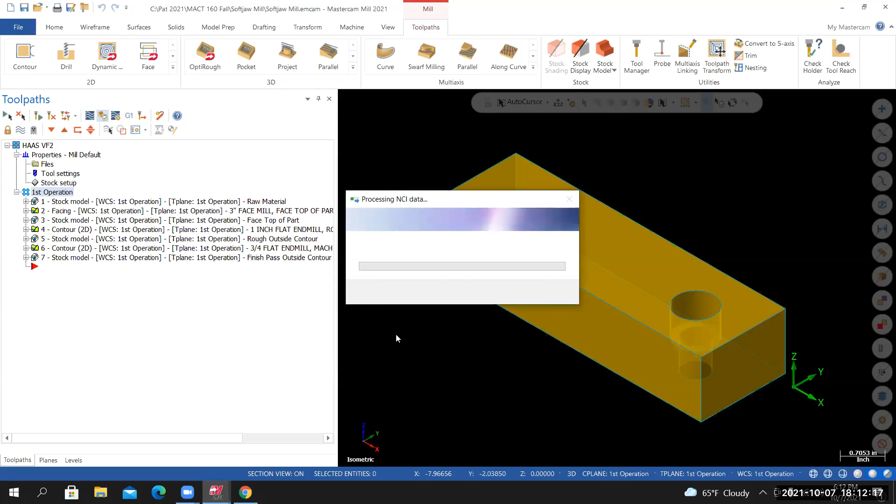Takes a moment for Verify to open up. Once it's opened up, make sure the stop condition collision is activated. I got a check next to it. And then run it. So what we've done so far is we faced 20 thousandths of material off the top of the part. We machined the outside profile with a dedicated roughing tool, and then we came in and we finished the outside profile to the finished dimensions with a dedicated finishing tool.

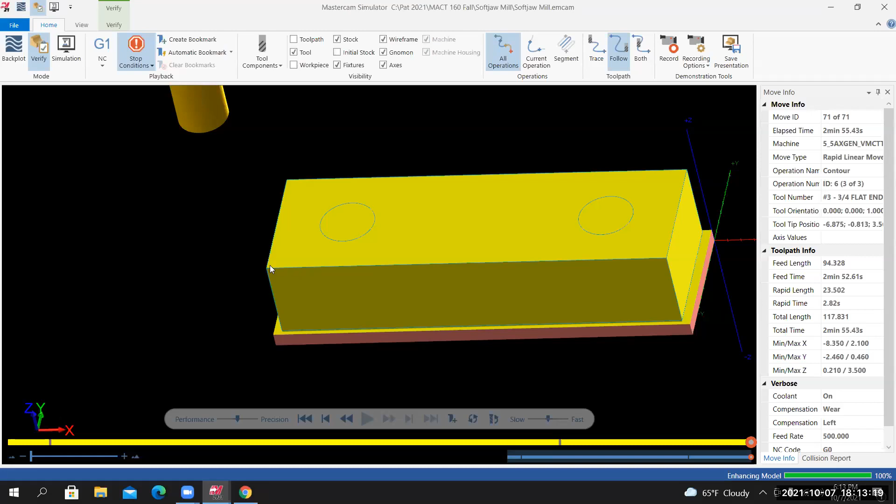What we'll need to do now is we'll need to spot drill, create pilot holes for the drill that's going to go all the way through the part. We'll need to drill through with a 17/32 diameter drill, or the drill that's specified on the drawing. We'll need to machine the counter bores. We'll use a chamfer mill to break any sharp edges that we might have created. And we're also going to engrave our initials on this top face right here.

So from here, I've got a good idea where we need to go. I'm going to exit out of Verify. Looking at it from an isometric view, we'll go back to the project page and we'll follow the instructions given there. So we've completed step 5. We're moving on to step 6. Use the drill toolpath to create the 0.25 pilot holes in the part.

So I'm going to scroll all the way down to the tool list. We've used tool 1, the face mill. We've used tool 2, the dedicated roughing tool, and tool 3, the dedicated finishing tool. Now on tool 4, this is our 1/2-inch diameter spot drill, 90-degree DPA. We're being instructed to use a C4 C3-0032 tool holder, and the tool projection, or the tool stick out, is 1.5 inches. So I have enough information to work with.

I'll go back into Mastercam. Make sure the insertion arrow is at the very end of the toolpath group. Go to toolpaths. In the 2D section, select drill. Brings up the toolpath hole definition dialog box. I'm going to select the large circle that represents the counter bore on this top face here. Now be careful, don't lock on to the quadrant. If you position your cursor on the outer edge of the circle, you'll see the center point icon pop up next to your cursor. That's what you want.

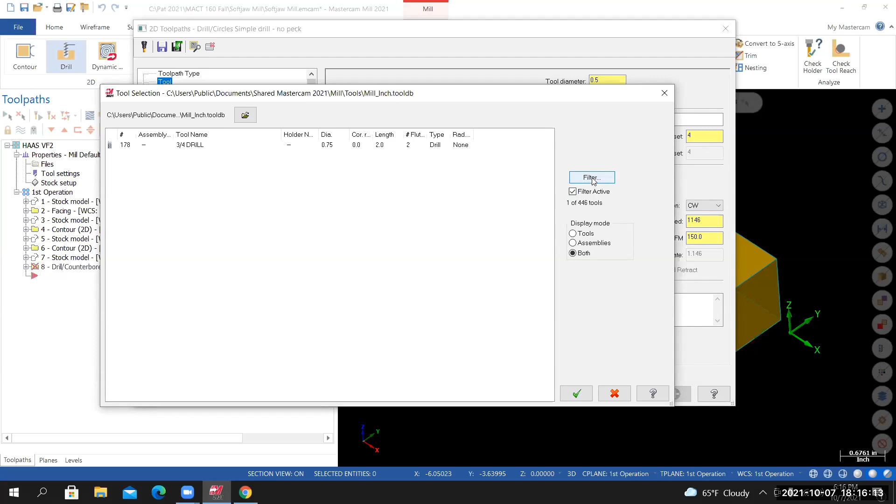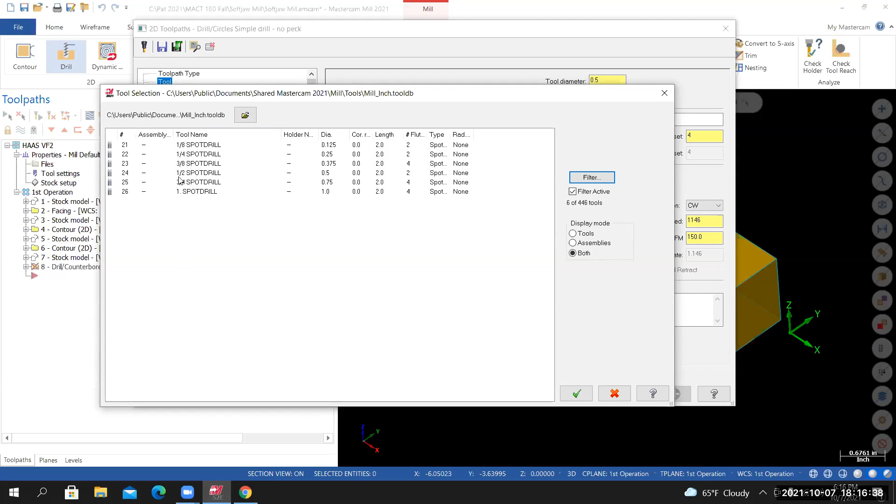I'll deselect drill. I'll select spot drill. And to see all of the spot drills coming out of the library, I'll set the tool diameter to ignore. From here, I'll select OK. Out of this library, we have 6 spot drills to choose from. The 1/2-inch diameter spot drill is the one I'm interested in, so I'll double click on it. And it's added to my tool list as tool number 4. I'll need to make some changes to the default settings of this tool. To do that, I'll right click on the tool. And from the flyout menu, select Edit Tool.

Things that I'll change on this page. It's showing the cutting length to be 2 inches in length. On a spot drill, usually the cutting edge doesn't go beyond where the full diameter begins. And it doesn't have the ability to remove or evacuate chips beyond this edge in most cases. So to create a more realistic representation of the tool, I'm going to set the cutting length to the drill tip length. So 0.5 times 0.5.

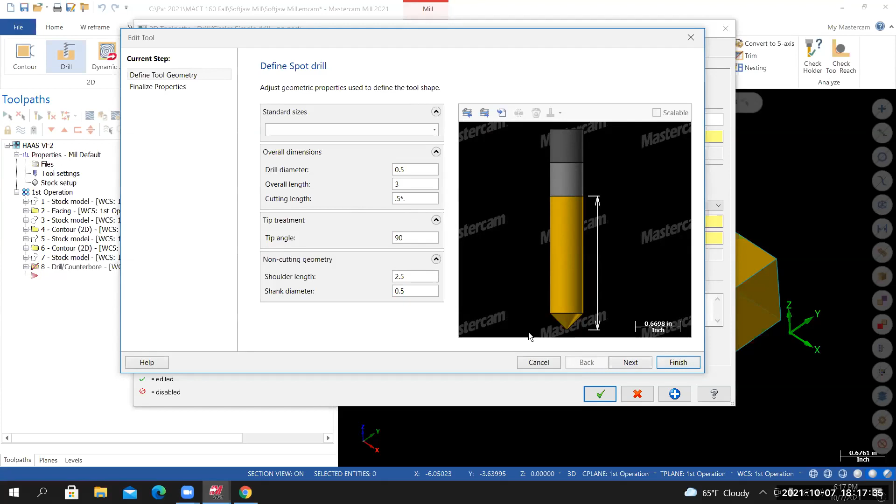The cutting length is 0.25 inches long. And then for the shoulder length, I'll just set this to 1. Mastercam will only let us hold on to the dark gray area of the tool. So if this value is too great, it'll only let us have a tool projection or a stick out length of 2.5 or greater. So I'm setting this shoulder length to 1, and that way we can set our tool projection to 1.5.

From here, I'll select finish. I should not have selected finish, my bad. So we're gonna have to go back into that tool. So right click, edit tool. This page is complete. I still need to go to the next page, so I'll select next.

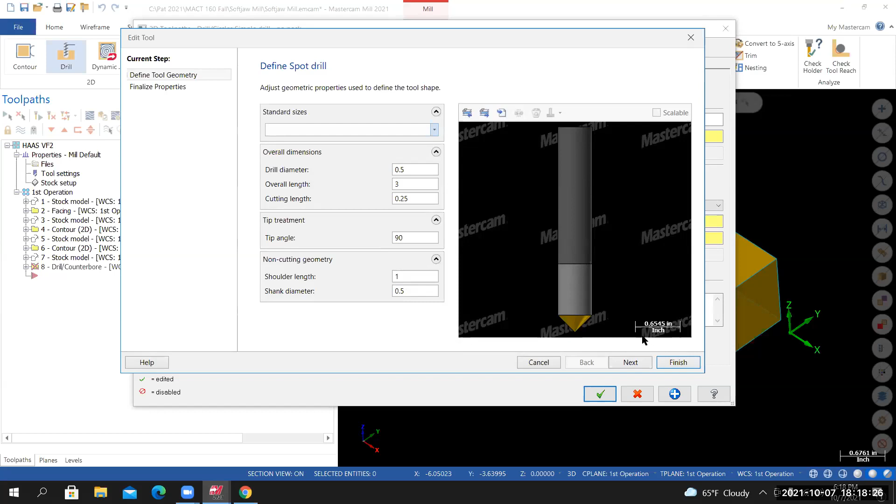To get Mastercam to calculate the feed rates correctly, set the number of flutes to 1. To calculate the RPM, I'll select the calculator. And then to turn the coolant on, I'll select show more options. I'll select coolant, and then under flood, turn it to on. From here, I'll select OK. And that'll be all the changes that I need to make to this tool.

So just to recap what we did: number of flutes 1, calculated the RPM, and then I turned the flood coolant to on. From here, I'll select finish. Back to this page, we've already calculated our RPM. We'll need to update our feed rate.

Now with drills, think of the FPT as feed per revolution, FPR. To calculate our FPR, the FPR will be equal to 2% of the tool diameter. So we have the decimal equivalent of the tool right here. I'll type in 0.5, multiply by 0.02. That's 2%, hit enter. Mastercam is calculating the feed rate for this drill at 11.46 inches per minute.

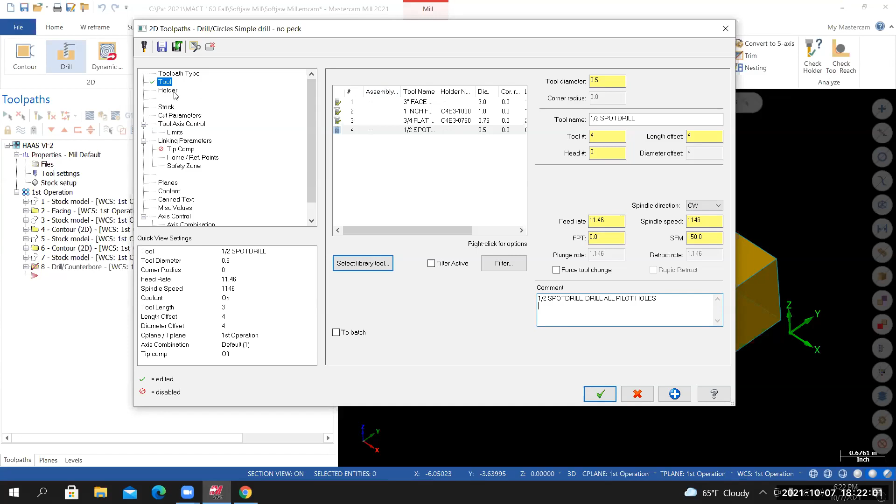So from here, I've completed this page. Once again, make sure that these comments are all caps. From here, we're going to go to the tool holder. We're going to use the tool holder that's been identified on the project page. So go down to the tool list. We're using a C4C3-0032. Tool projection is 1.5 inches. Now that's a Cat 40 inch tool holder.

Instead of looking through this long list of tool holders, I'll go to Open Library. CT40-IN, Cat 40 inch, open it up. And it's a shorter list. These are all Cat 40 tool holders. I'm looking for the C4C3-0032. This is an ER32 type tool holder. It's a collet tool holder. Set the tool projection to 1.5 inches. And that'll complete all of the changes that we need to make on this page.

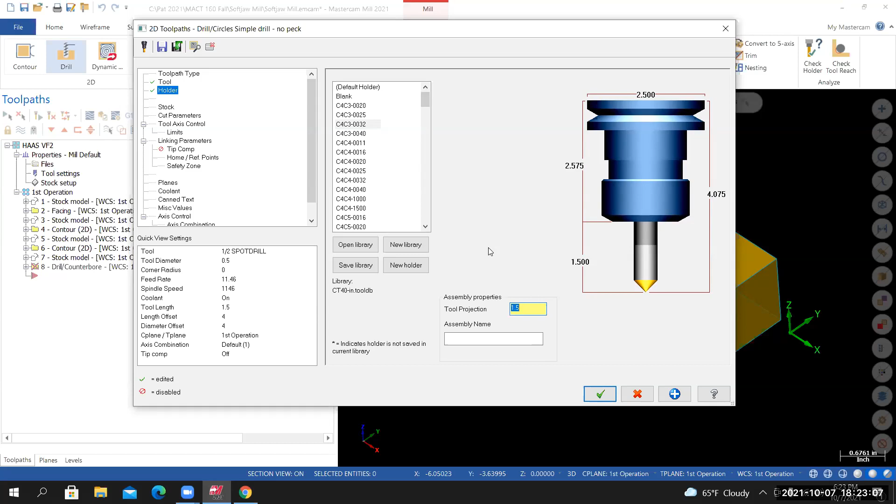From here, go to cut parameters. The cycle should be drill/counterbore. And if we have the dwell value set to 0, it's going to create a G81 drilling cycle inside of our NC file, and that's what I want. We're creating a pilot. There's no need for a dwell, so set this to 0.

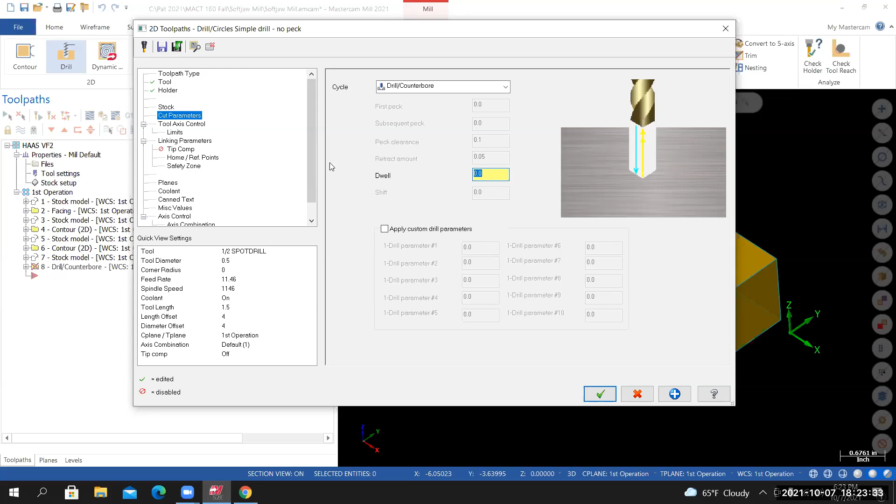From here, jump down to linking parameters. We're going to use the same clearance that we used for the previous toolpath. So activate clearance, set it to absolute. We're using a clearance plane of 3.5 inches. That'll place the tool at least 2 inches above the top of the part when it's rapiding from one location to the other.

I'll check use clearance only at the start and the end of the operation. For the retract, I have it set to incremental. I'll set the retract value to 0.1. For the top of the stock, I'll set it to absolute. Remember our origin is at the bottom of the material, so this top of stock is going to be greater than the part thickness. So I'll select the top of stock icon. I'll let my cursor lock on to the top of the part.

1.48, absolute. And for the depth, I'll set it to absolute. I'm creating a pilot or a countersink, and we can control the diameter of the countersink by using the calculator that's provided. So in this case, I'll select the calculator. From the depth calculator dialog box, I'll select overwrite depth. And for the finish diameter, we're instructed to create a pilot 0.25 in diameter. So set the finish diameter value to 0.25 and hit enter. From here, select OK. And you can now see the value here, the top of stock is 1.48.

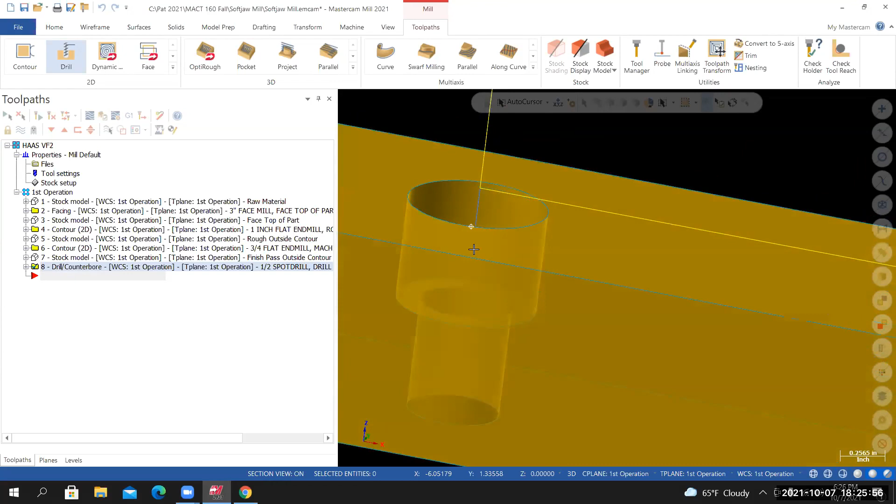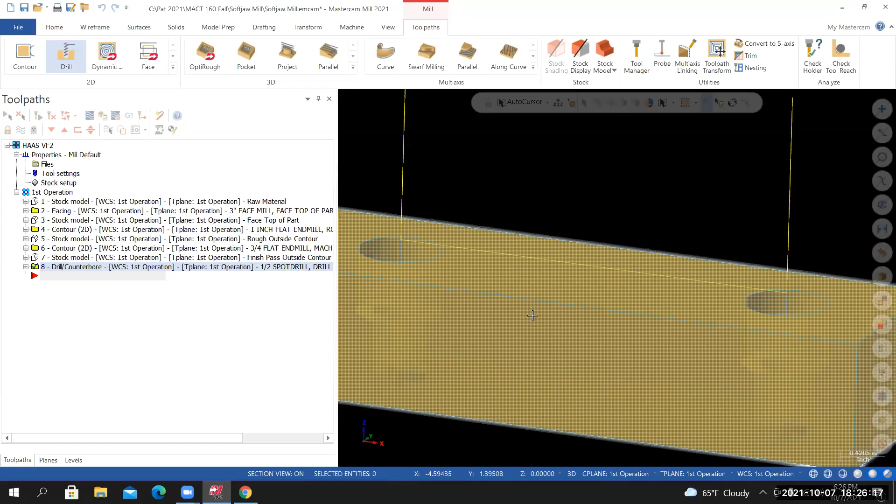I can see the tool path. The yellow lines represent rapid moves. And if I zoom in, you can see the blue lines. Those are feed moves. So the blue line represents the drill moving through the material at 11.46 inches per minute. I don't see any issues with the tool path. If this yellow line was moving through the material, I could then see that I would have a problem. So I don't see any issues with the tool path yet.

We'll run it in backplot. And to do that, I'll select the tool path. I got a green check next to just that tool path. I'll select the backplot icon and slow it down a little bit. With just 2 holes, I want to go kind of quick. So slow it down, select play. A little too slow, so I'll speed it up. Not seeing any issues with backplot. So from here, I'll exit out of backplot.

I'll toggle off the display of that drilling operation. So toggle display. I'll look at it from an isometric view. I'll fit my screen and I'll unzoom 80%. And before I go to verify, I like to save my work. So file save. To run the entire toolpath group inside of verify, I'll select the first operation toolpath group. You see green checks appear next to everything. And then I'll select verify. Double check, make sure stop condition collision is turned on, and then run verify.

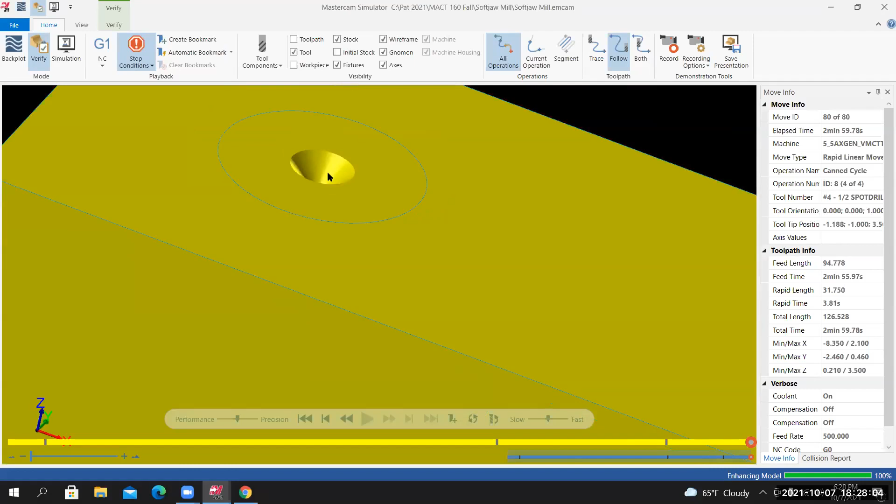I'm inspecting the machined model and you can see the 1/4 inch pilot holes drilled on the top surface of the part. Their intention is to guide the drill that's going to go all the way through the part. So everything looks good here. From here, I'll exit out of verify.

I need to create a stock model that reflects all of the tool paths that we've created up to this point. Make sure that the insertion arrow is at the very end of your toolpath group. Go to the toolpath tab. In the stock section, select stock model. In the name field, let's call this drill pilot holes. Stock plane, I have it unchecked. It's at the top. Initial stock shape. Let's use the stock model from the previous operation.

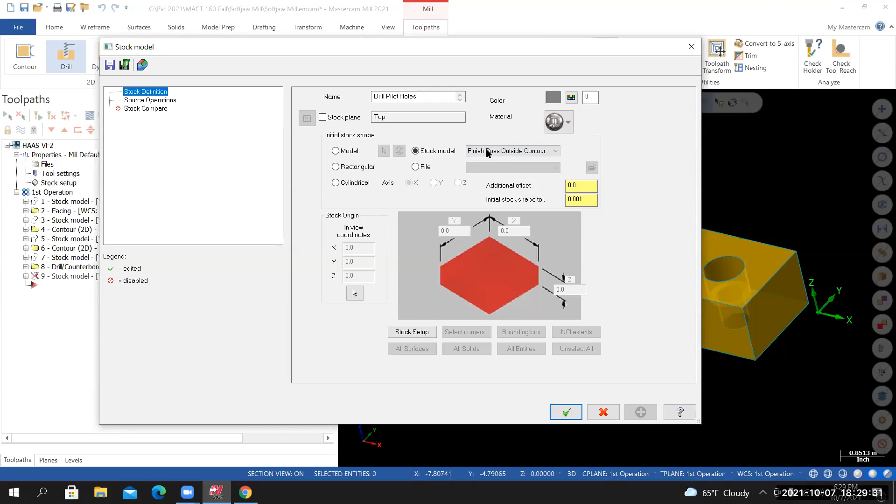So select stock model, expand the stock model menu, and I'm going to use the finish pass outside contour. Now yours might be named slightly different. This is a stock model that I created from the previous toolpath that we created. So I'll select that stock model, and then I'll go to source operations. And for the source operation, let's select the drilling operation that we just created. I'll select OK.

You'll see the stock model appear. And I like to inspect it and make sure that it's correct. So you can see that the majority of the material is still inside of the holes, but you can also see the pilot at the top center of the hole. So that's what I wanted to see. Everything looks good. From here, I'll toggle off the visibility of the stock model. Once again, I'll look at it from an isometric view and I'll save my work.

So now that we've created the pilots for the drilling operation, I'll go back to the project page and move on to, let's see here. Oh, something's happening here. So creating, okay, got it. So we have moved on to step 7. We've created the pilot holes. We're now going to drill through.

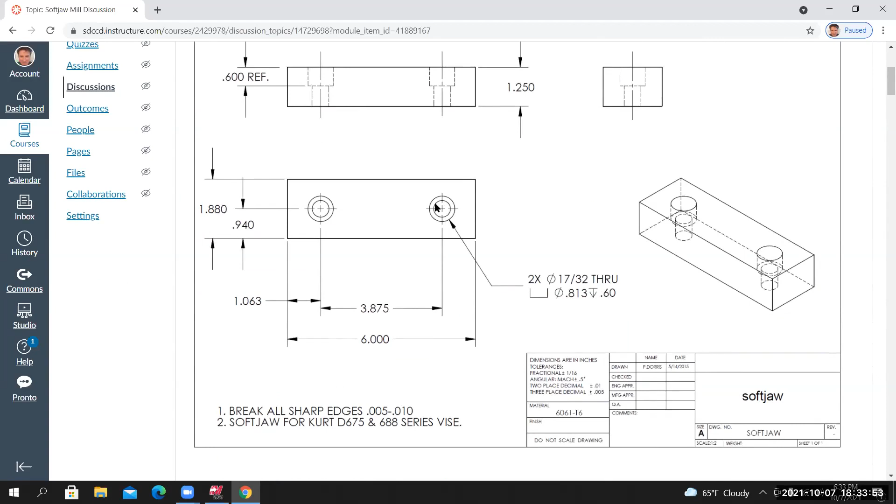So use the drill toolpath to create the 17/32 diameter holes in the part. And if I look at the blueprint, just to check, the 17/32 diameter hole goes all the way through. So we'll have to make sure that we do that inside of the program.

If I go down to the tool list, tool number 5, this will be our 17/32 diameter drill. It's got 118-degree drill point angle, DPA. And we're instructed to use a C4C3-0032 tool holder. Tool projection will be 2 inches. Okay, so let's go back into Mastercam.

Now, something that we can do, it might save us a little bit of time. It might cause more problems. We could actually copy this toolpath. I don't know if I've shown you guys how to do that yet, but if you've got drilling operations, sometimes there'll be a sequence of drilling operations. It could be a pilot, a drilled hole, a countersink, a tap. So there could be a series of drilling operations that are considered similar or like drilling operations.

And in situations like that, it'll save you a lot of time where you copy existing toolpaths, make a few changes to that copied toolpath, and it works for the next tool. So let's try doing that. We'll have to be very careful on how we go about doing it. First off, if you have everything selected, select just the item that you want to copy. So I'm going to copy the drilling operation that we just created. So in my case, it's operation 8. There's a green check next to just number 8, the drilling operation.

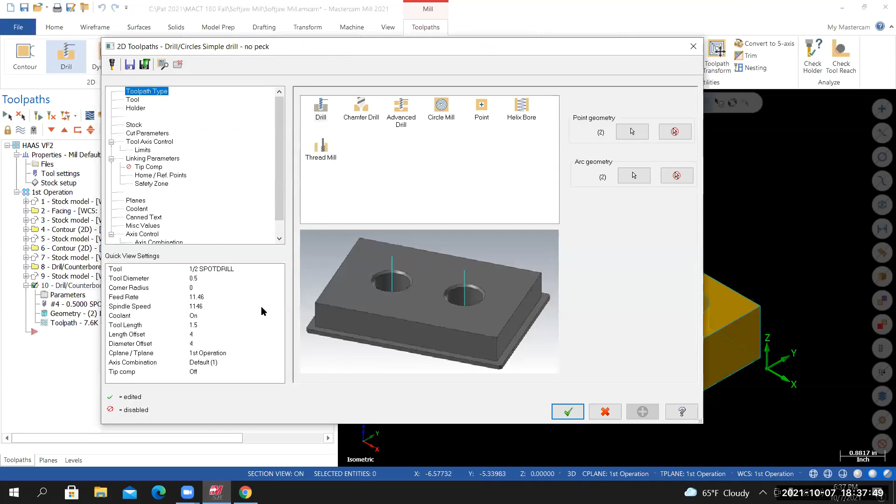So once you have that new toolpath pasted in your toolpath manager, expand it. And can you guys see my screen? Yeah. Okay, perfect. So once you have that toolpath pasted into your toolpath manager, select parameters and then go to tool. This particular toolpath is currently referencing the 1/2 inch diameter spot drill. We're going to add the 17/32 diameter drill to our tool list.

Select the select library tool. Now my filter is still active, so I'll go to filter. I'll deselect spot drills. I'll select the icon right above spot drills, drill. And for the tool diameter, it's currently set to ignore, set it to equal. And then in the value field, type in 17 divided by 32, or the decimal equivalent of 17/32. So 17 divided by 32, hit enter. 0.53125 is the decimal equivalent. I don't expect you to remember that.

So from here, I'll select OK. I've got one tool that fits that description. Double click on it. And it's added to my tool list as tool number 5. I'll need to edit the default settings for this tool. Right click on the tool, select edit tool.

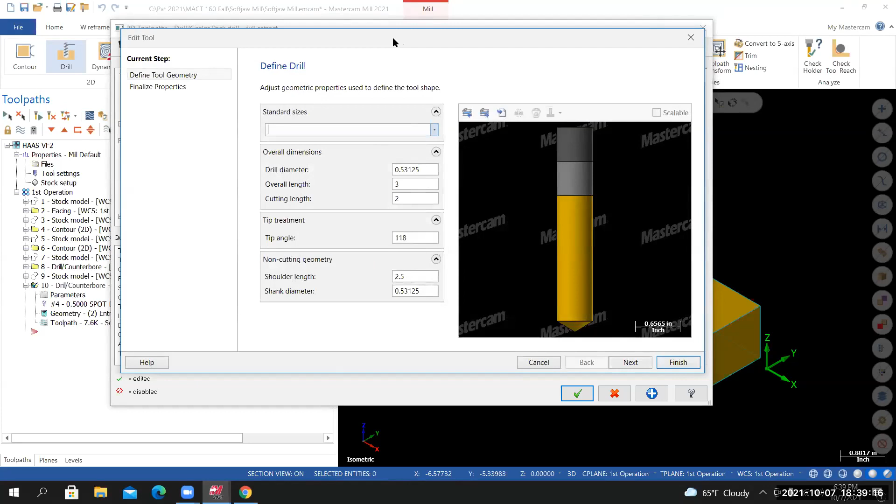Right away. If I remember correctly, we were told to use a tool projection of 2 inches. So I'll need to make some changes to the cut length and to the shoulder length. Go back to the project page, saying tool projection is 2 inches. To make that work, let's set the cutting length to 1.75 and then set the shoulder length to 2. And that'll allow us to set the tool projection to 2 inches.

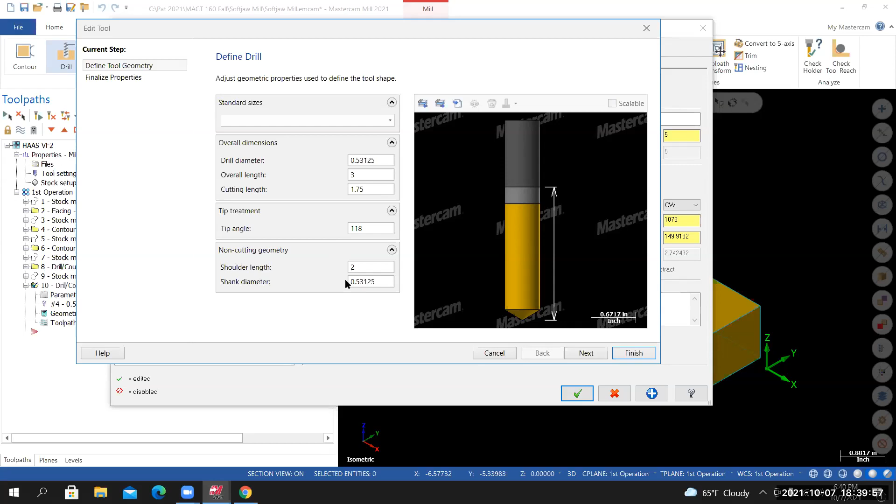Once you make those changes, select next. On this page, we'll start with changing the number of flutes. To get Mastercam to calculate the feed rates correctly, set the number of flutes to 1. And we do that for drills. To calculate the RPM, select the calculator. To turn on the coolant, select show more options, select coolant, and then set the flood coolant to on. From here, I'll select OK. And that should complete all of the changes that we need to make to this page.

Oh, Professor, can you go back to the tool edit again? Yeah, sure. Tool edit, back to the geometry page. Yeah, that one. No, this is good. I just wanted to. Yeah, so the cutting length 1.75, and then the shoulder length 2. Then you had 1 flute, right? Yeah, that's on the next page. Set the number of flutes to 1. Select the calculator and turn the flood coolant on. Cool. Thanks. All good? Yeah. Thanks. Hey, you're welcome.

So from here, let's select finish. And you can see the RPM has been calculated, and this is a rounding issue. So we use a 150, but what you're seeing here is a reduced value, because we want a whole number here. So that's what's actually being used. It's still 150. Just look at it that way. It's so close. We'll just call that 150.

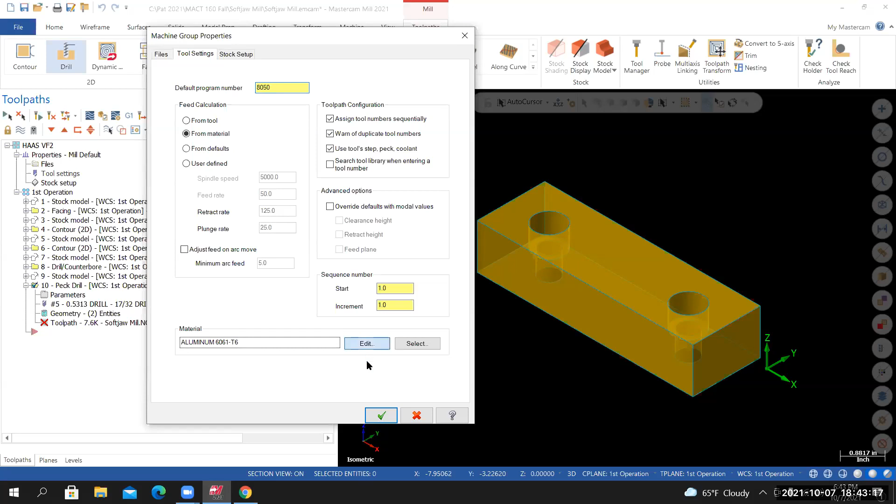Yeah, so I'm going to select OK. I'm going to have to do the same, select OK. Go to tool settings. So you exited the toolpath. Go to tool settings. Where it says material, go to edit. I believe yours is set to 60% right here. So percentage of base, what is yours saying right now? Mine's at 50. It's at 50? Yeah. Okay. And what was the other one at? Okay.

So now go back to the parameters. In this field, make sure you type in 0.53125 times 0.02. So 0.53125 times 0.02. And mine's at 11.46. Did that resolve the problem? It's calculating the feed rate as 12.17. What's your FPT? 0.0106. 0.0106. What's your spindle speed? That's set to 1146. 1146. And your SFM, what's your SFM? 159. 159. Okay, so this is what we're gonna do.

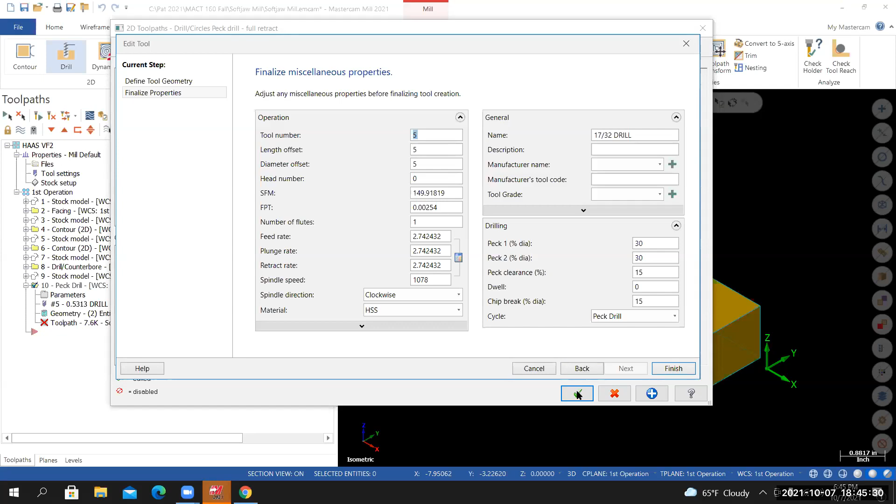Go back, right click on the tool, select edit tool. Go to the next page. Are you on the same page as me? Yes. Select the calculator. And what's your RPM now? What's that? SFM is 149. 0.91819. That's correct. And your spindle speed should be 1078. Is that what you're getting? Yes. Perfect. Okay, select OK. Oh, I'm sorry, select finish, my bad.

And now in these fields, you should see the updated SFM and the updated RPM or spindle speed. Now go over to the FPT. Now you'll notice when you go back in and edit the tool definition, it changes the feed rate back to whatever it was previously. So in the FPT field, take the tool diameter 0.53125 times 0.02, enter. And you should get 11.45 and some change for your new feed rate. Yeah, that fixed it. Perfect.

Cool. So from here, let's make sure we have a comment in the field. This comment is from the previous toolpath. Remember, we copied this toolpath, so clear that out. I'm going to borrow the tool name. I'll paste it down in the comment field. And let's do this. Say drill all holes through.

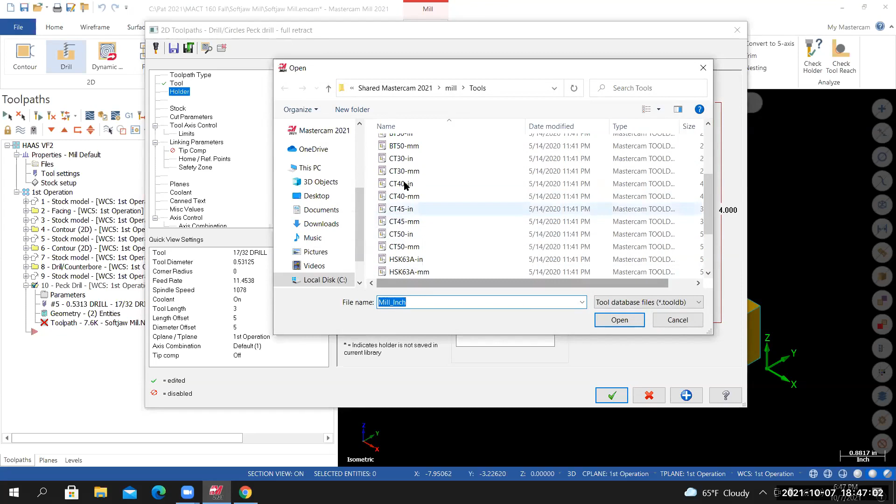And that'll complete all the changes that we need to make to this page. We're going to use the same tool holder that we used for the previous tool. So go to holder. We're going to look in the Cat 40-inch tool holder library. So go to open library. CT40-IN. Open that up.

And we're going to use a C4C3-0032. Select it and set the tool projection to 2 inches. And that's what we're instructed to do on the project page. So the tool projection, you need to be aware of what your tool is, what you need the tool to do. So if I was drilling a hole that's 3 inches deep, would this situation or would this setup work for me?

No. No, it would work until we got to about 1.999 inches into the part. Does that make sense? And then that next peck would be pretty bad. So you want to make sure that the tool projection is greater than the depth that you're drilling to. So just something to be aware of.

And the tool projection will also be, with other tools, it just needs to be long enough so that when you're cutting the part, the collet nut or the tool holder doesn't run into the material. So that's what we're controlling here. So when we set these values, they will turn up later in the setup sheet. And that's how far the setup guy knows to extend the tools from the tool holder. That make sense?

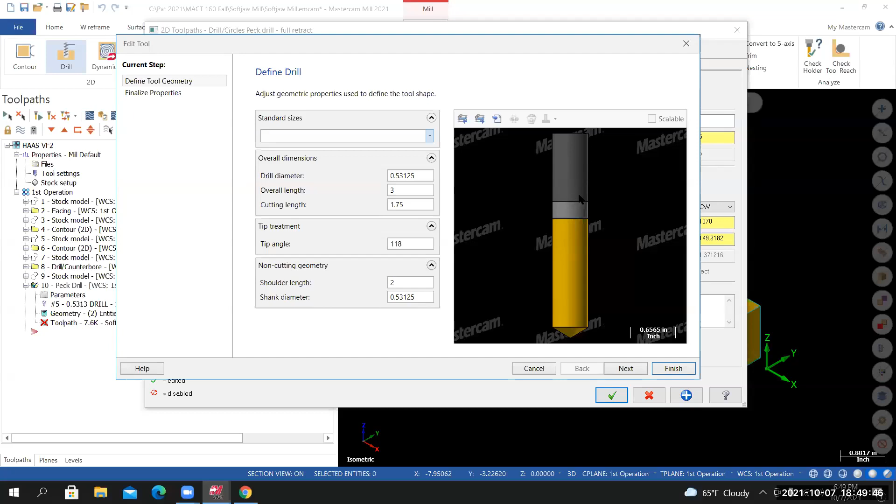Now, this isn't a very realistic scenario. With drills, you could probably choke up on them even onto the cutting flute, which I don't recommend, but it's possible. So Mastercam only lets us hold on to the dark gray area of the tool. So that's why we have to change the cutting length and the shoulder length. So cutting length, I had to shorten it, the shoulder length, I had to shorten it. And in this case, the shoulder length is becoming our tool projection. So from here, I'll select finish.

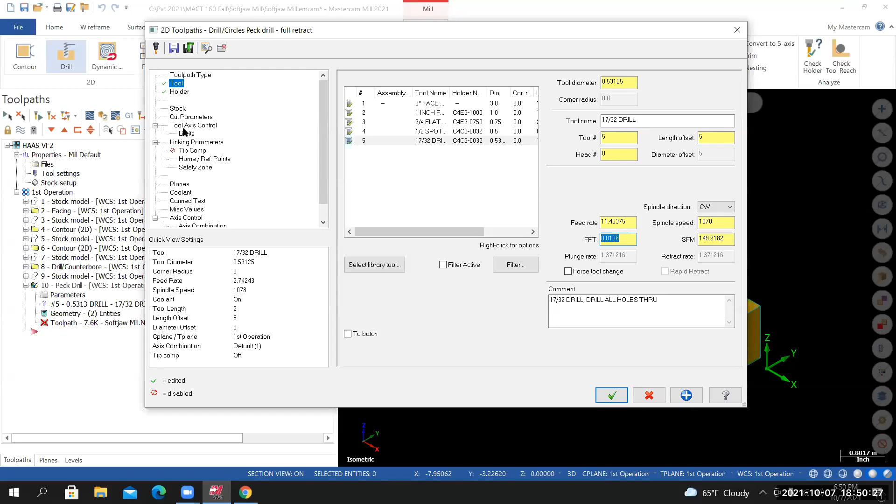Now, the drawback of editing the tool is it changes my feed rate back to whatever the first value was. So I have to go to FPT, 0.53125 times 0.02. I have to recalculate my feed rate. I'll jump down to cut parameters. Now, when we changed over to a regular style drill, not a spot drill, Mastercam changed over to a peck drill cycle. And then the peck increment is equal to the drill tip length.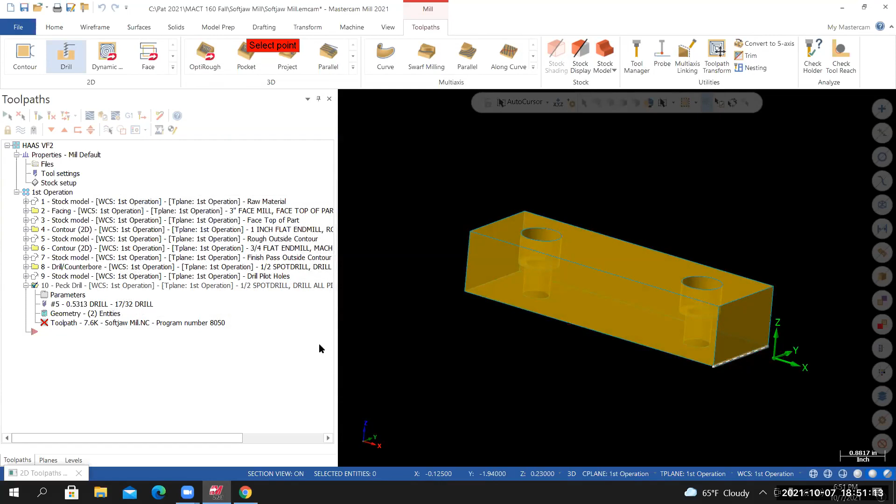From here, go to linking parameters. Remember, this is a copied toolpath, so most of this information is already filled out. Everything will work except the depth. The depth was calculated by Mastercam to create that pilot. I need this hole to go all the way through the part. So I'll select the depth icon. I'll select the bottom of the part. And you can see that it's now drilling to 0.23 relative to the origin.

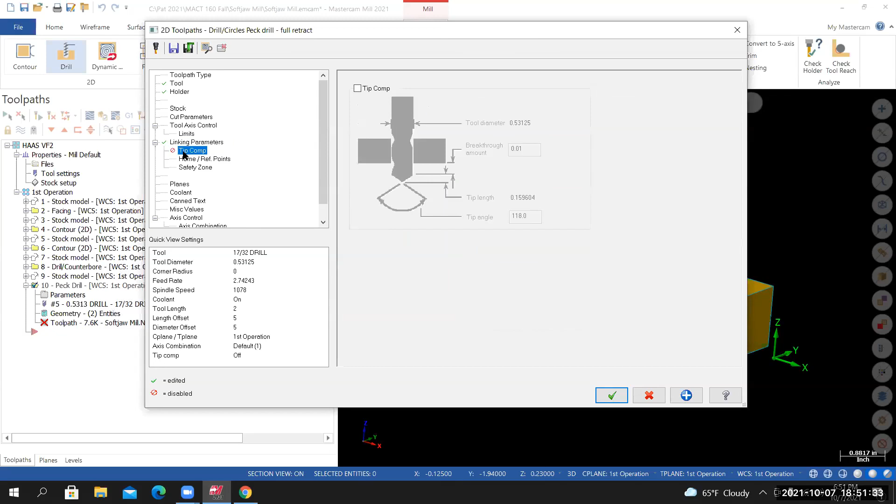Now, this value is telling it how far to send the tip of the tool into the part. I need a full diameter going all the way through the part. So I'm going to activate tip comp. So select tip comp, select the checkbox, set the breakthrough amount to 0.025. And you can see, this graphic here explains what's going on.

This is the bottom of our part, and you can see it's going to go an additional amount based off of this breakthrough amount. And then the tip length that Mastercam is calculating. This tip length is based off of the 118-degree DPA, and that matches our tool. So from here, I'll select OK. Now, because it's a copied toolpath, we'll need to regenerate it. So I'll select regenerate dirty operations. And now with just that new toolpath selected, I'll run it in backplot.

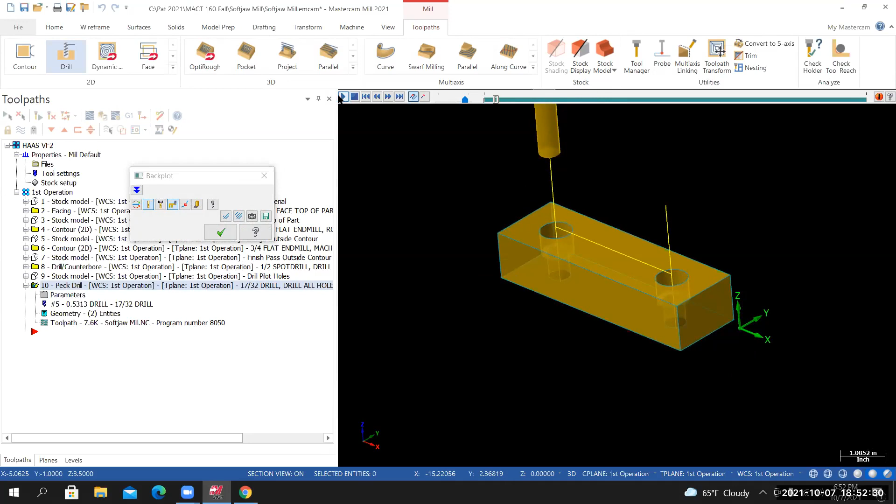I can see that the tool is going all the way through the part, and to double check that, if I look at it from a front view, I'm hitting the S key to single step through. Now, here's our final depth that we're drilling to. And I can see the full diameter is going all the way through the part, and that's what I want to see. So that looks good.

From here, I'll exit backplot. I'll look at it from an isometric view. I'll save my work. And we're going to run the entire toolpath group inside of Verify. So I'll select the first operation toolpath group. I get green checks next to everything. I'll select Verify. Make sure stop condition collision is turned on. And run Verify.

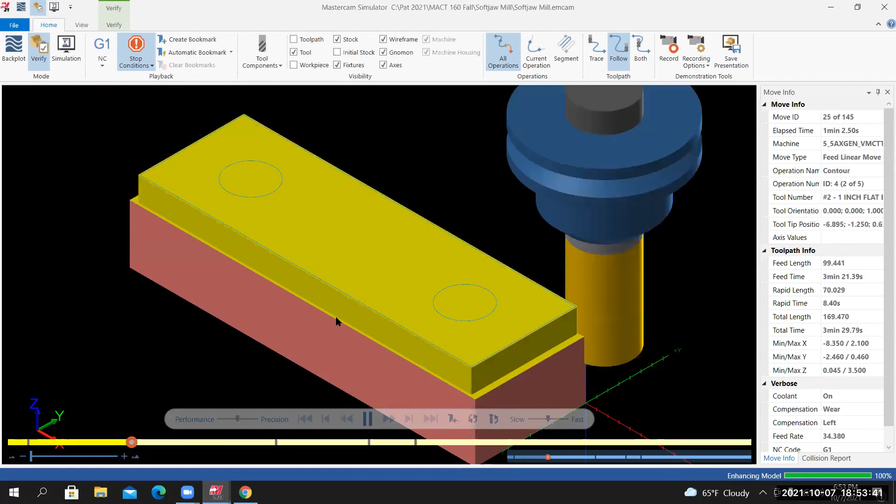Now to inspect the machined model or machined part, I want to see how deep the drill has gone into the part. And I want to change over to a translucent stock. And you can do that inside of Verify. So Home tab, in the visibility section, you'll see a check next to stock. If you left click on it once, it changes over to a square inside of that box. And our machined model is now transparent.

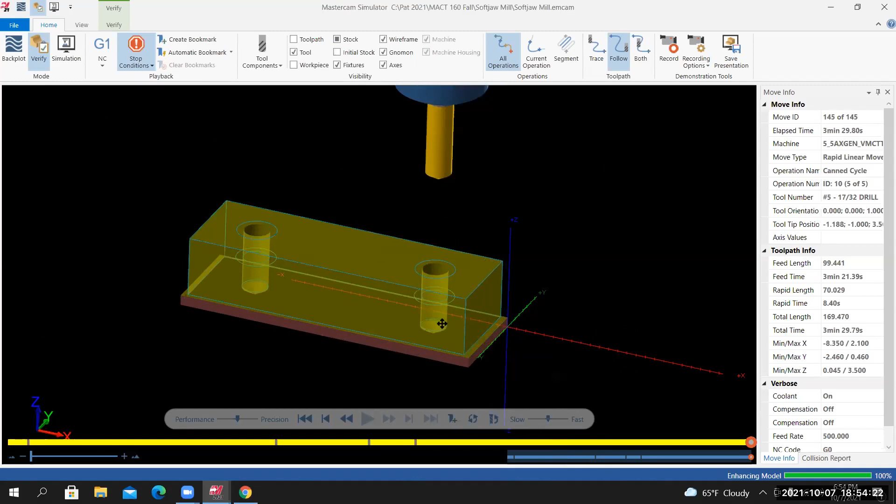And I'm zooming in, and you can see this circle here, this bottom edge of the hole. You can see the full diameter of the drill goes all the way through. And that's what I wanted to check for. So once you verify that the machined model is correct, if I select stock again, it changes over to a wireframe view. The box is empty. If I select it again, the check reappears and we are now looking at a shaded view.

So everything looks good. From here, I'll close out Verify. I'm looking at it from an isometric view. And the next thing I'll do is I'll create the stock model that reflects everything that we've done up to this point. The insertion arrow is at the very end of the toolpath group. From the toolpaths tab, in the stock section, I'll select stock model. For the name, let's call it drilled holes.

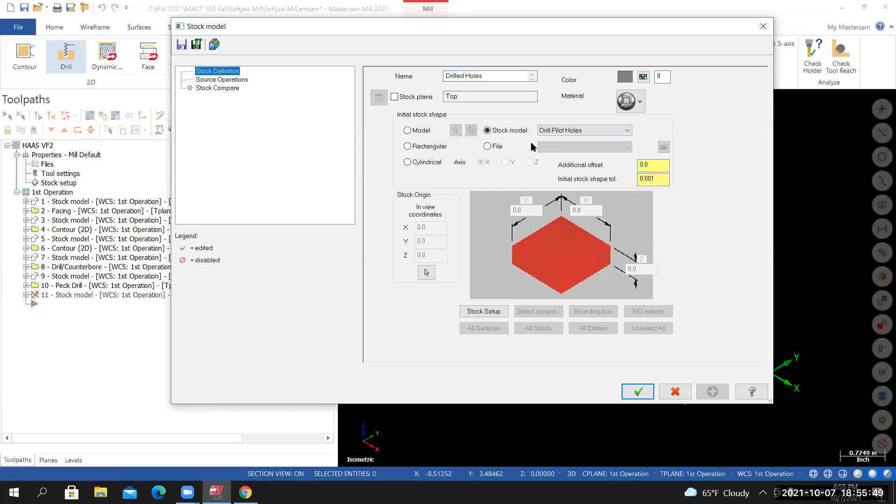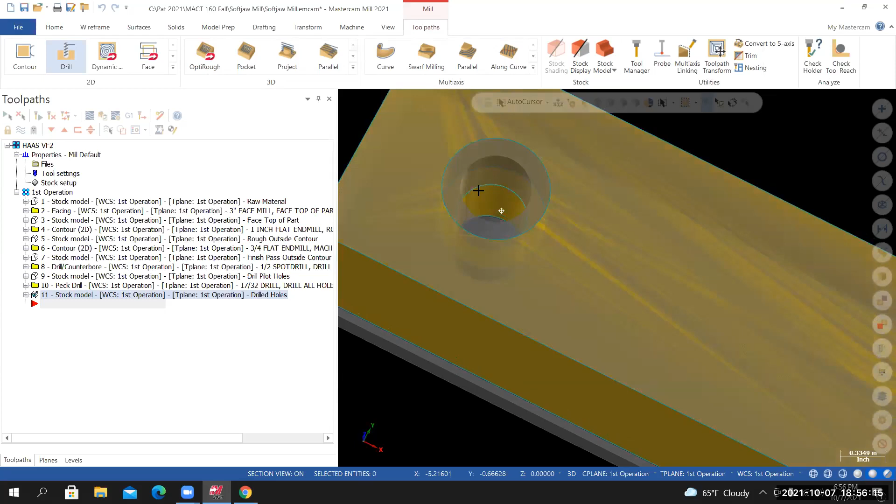For the initial stock shape, once again, we're using a stock model. Let's use a stock model from the previous operation, so drill pilot holes in my case. And then for the source operation, let's select the drilling operation that we just created. And then I'll select OK. Mastercam processes the stock model. You can now see we've got the drilled holes going through the part. The next thing we'll need to do is machine out the material to create the counterbores. Once you verify that the stock model is correct, toggle off the visibility of it. Looking at it from an isometric view, and I'll save my work.

So now that we've drilled the 17/32 diameter holes through the part, I'll go back to the project page. And we're looking at the next step here. We are instructed in step 8: use the helix bore toolpath to create the 0.813 counterbores in the part. Okay. And we'll also check out the tool list. Let's see what tool they need us to use.

So we just brought in tool 5, the 17/32 diameter drill. Tool 6, it's going to be a 3/8 inch flat end mill, 3 flute. And we're going to use a C4E4-0375 tool holder, and we'll have a tool projection of 1 inch. So this is a solid type tool holder. There will be a set screw that lands on the flat of the shank of the tool. So let's do this. We'll go back into Mastercam.

The insertion arrow, very end of your toolpath group. From the toolpaths tab, in the 2D section, I'm not seeing the helix bore toolpath. So I'll need to expand the gallery. And in the hole making section, you'll find helix bore. So toolpaths, 2D, expand the gallery. In the hole making section, helix bore. Brings up the toolpath hole definition dialog box. Once again, we need to select the 2 holes that we're creating.

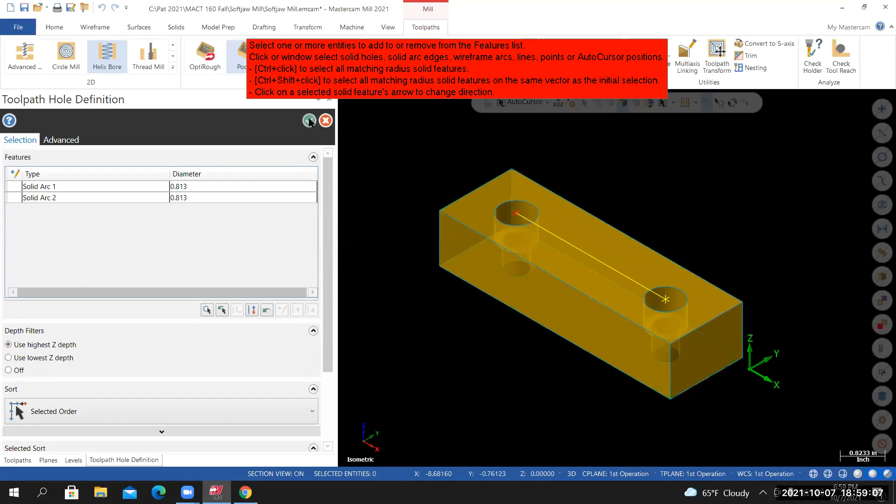Select the 2 circles that represent the diameter of the counterbore, the ones that are on the top of the part. So I'll select here, and I'll select here. 0.813 in both cases. I'll select the green check. Brings up the helix bore dialog box. Start by going to the tool.

We're going to add that 3/8 diameter flat end mill to our tool list. So I'll select library tool. Now it's already here, but you guys probably don't see that. So make sure the filter is active. So I have a check next to filter. Go to the filter icon. Let's assume that I have all tool types selected. So I'll start by selecting none. I'll select end mill flat.

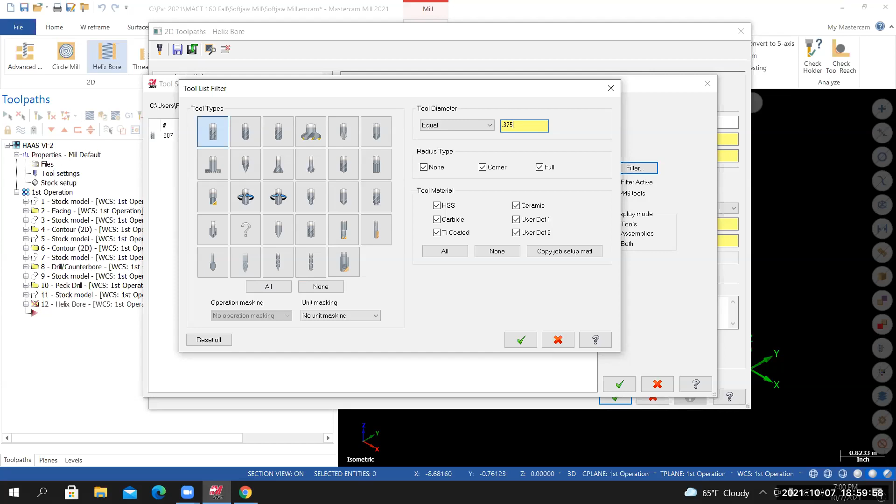Set the tool diameter to equal, and then set the value to 3/8, 3 divided by 8, or you could type in the decimal equivalent, 0.375. Either one will work. From here, select OK. I've got one tool that fits that description. I'll double click on that tool. It's added to my tool list as tool number 6.

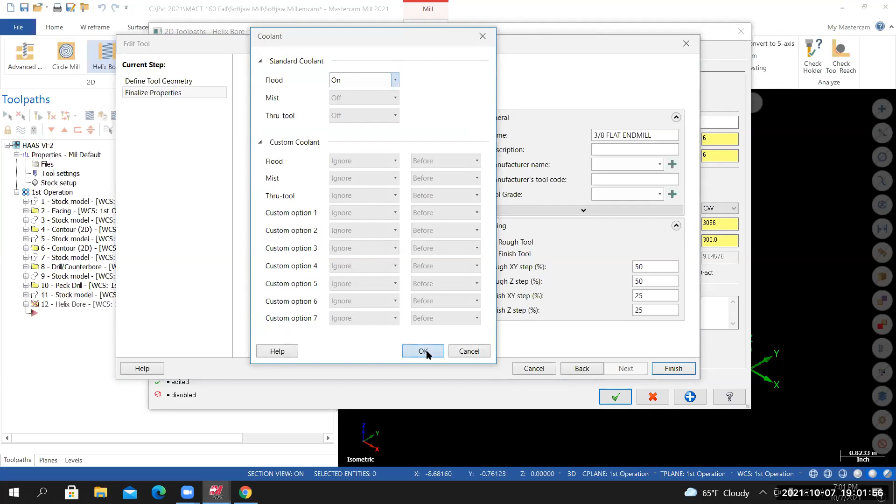The number of flutes, set this to 3. To calculate the RPM, select the calculator. To turn on the coolant, select show more options, select the coolant icon, and then set the flood coolant to on. I'll select OK. For the finish XY step percentage, set this to 2%. And that'll complete all of the changes that we need to make on this page.

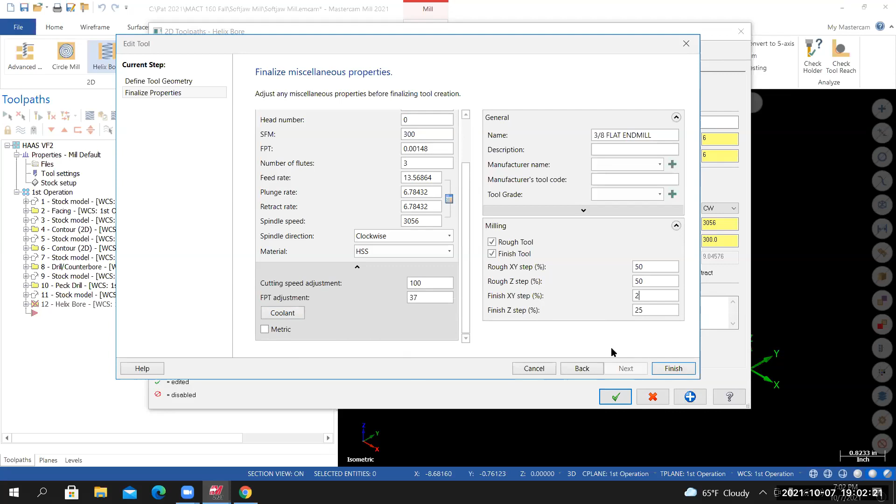So number of flutes is 3. I calculated the RPM, I turned the coolant on, and then I set my finish XY step percentage to 2. From here, I'll select finish. Back to this page, the RPM has already been calculated. For the feed rate, this is an end mill. We're going to set our FPT equal to 1% of the tool diameter. The decimal equivalent is here, 0.375. So 0.375 times 0.01, hit enter. My feed rate has been calculated at 34.38.

Let's set our plunge rate to half the calculated feed rate. So I'll type in 34.38, divide that by 2. I've got rapid retract selected and we'll provide a comment. So I'll borrow the tool name. I'll paste it in the comment field in all caps. Let's say machine counterbores. That completes everything I need to change on this page. Go to the tool holder.

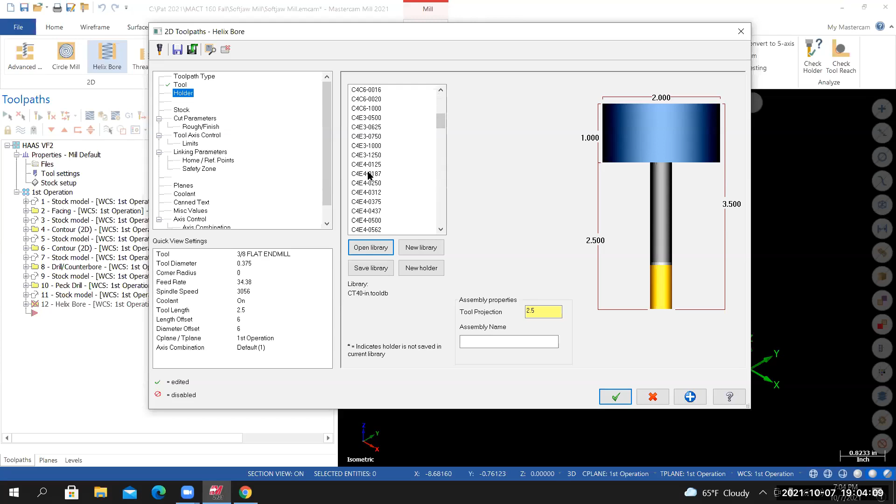From the tool list, we are instructed to use a C4E4-0375, tool projection 1 inch. So C4E4, this will be a Cat 40 tool holder. So go to Open Library, Cat 40 inch, C4E4, right here. So C4E4-0375. The last 4 digits represent the diameter of the bore in the tool. So this is a 0.375 diameter bore. For the tool projection, set this to 1. And that will complete all of the changes that we need to make on this page.

From here, go to cut parameters. For the compensation type in our program, we use wear. Compensation direction, left should be left. Diameter for simulation, we'll just leave this blank for now. Start angle, I'm going to accept the defaults on most of these. For the stock left on wall, set this to 0. Stock left on floor, set this to 0.

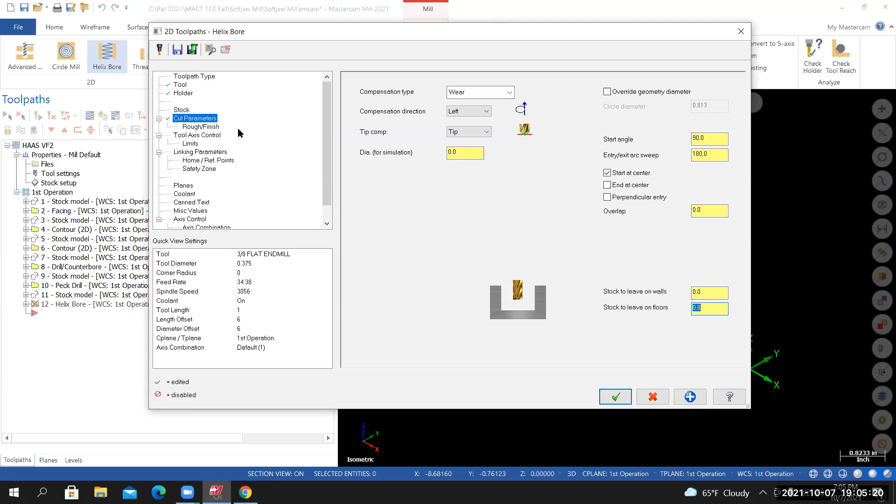For the rough finish, I'm going to accept the default for the rough pitch at 0.08. You can see the helix here, and then the pitch, or the distance from one spiral to the next as it's descending, is going to be 0.08. We're just gonna do it in one rough pass. Feed rate at final depth, so we can actually control it. We can reduce it so it gives us a nicer finish. I'm gonna bump this up a little bit. I'm gonna keep this at 75%. It's still a reduced feed rate, but it's quicker than what the default value was.

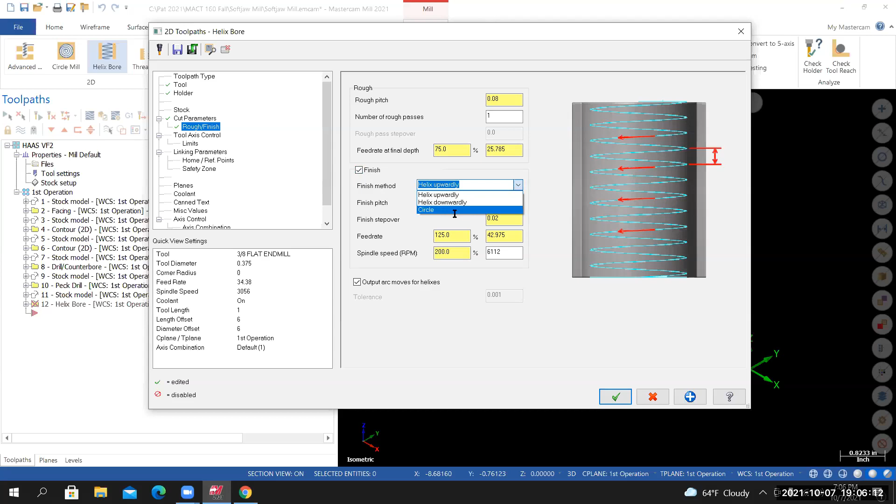For the finish method, so I'm activating finish. Set the finish method to circle. Finish step over, that's that 2% of the tool diameter that we were talking about. The feed rate, it's bumping it up to 125%. Let's just set this to 100. Spindle speed, we'll keep that at 100%. And I think that will take care of everything.

Go to linking parameters. Oh, we have to set all these values. This is a brand new toolpath in this session of Mastercam. So set the clearance to 3.5 absolute. I'll use clearance only at the start and the end of the operation. I'm turning retract off. I'll keep my feed plane at 0.1 incremental. Top of the stock, I'll set it to absolute.

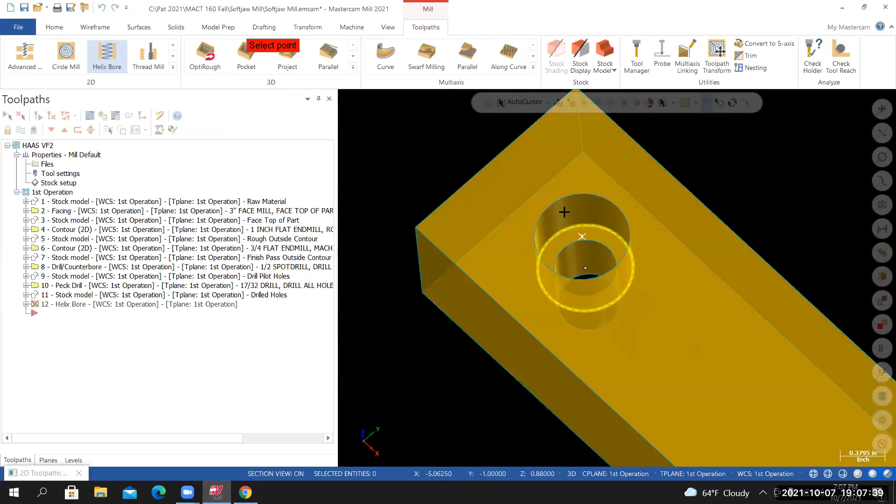I'll select the top of stock icon. And I'm going to pick something that represents the top of the part, which is the top of the counterbore. So I'm going to select the top of the circle here. For the depth, I'll set it to absolute. I'll select the depth icon. And this time I'm going to lock on to something that represents the bottom of the counterbore. And I'm getting 0.88 absolute. The difference between these two values should be 0.6.

And that should cover everything. We'll run it in backplot and see if we need to make any changes. So from here, I'll select OK. I don't know if that's going to work. We'll see. So from here, I'm looking at the toolpath. I don't see any rapid moves moving to the part. With just that helix bore toolpath selected, I'll run it in backplot. Select play.

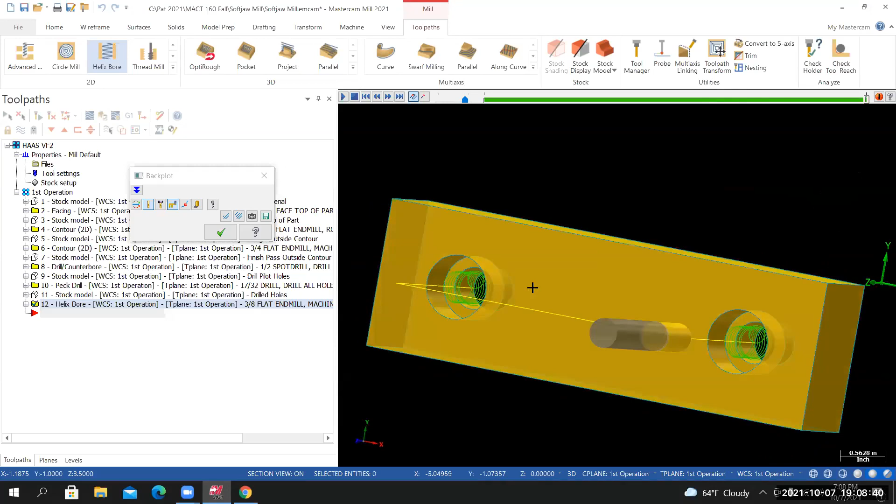So it does a helical motion all the way to the bottom of the pocket. And then when it gets to the bottom of the pocket, it does one final pass where it removes that extra, whatever 2% of our tool diameter was. So I'm liking what I see. Don't know if I like how it arcs in and arcs away. We'll see how that path is helicing back out. It's not just pulling it back out.

I can barely hear you. Can you repeat that, please? My toolpath, it's doing the helix motion in and out, not just in. Okay, so look at my screen here. Let me show you what I believe is causing it. If you go to rough finish. So under finish, your finish method, do you have it set to helix upwardly or do you have it set to circle? That's what it was. Thank you. Okay, perfect.

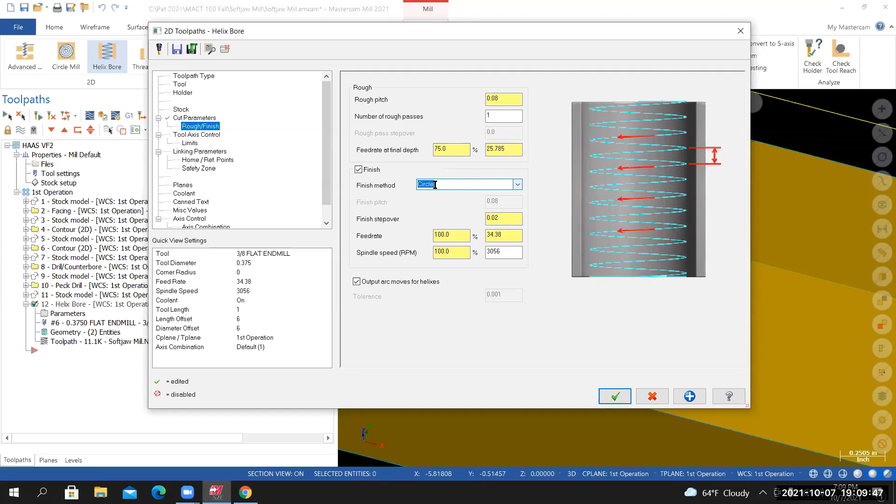So this is what's controlling that. You can do a finish pass where you get to the bottom, then you come right back up doing a helix, or it'll back out and then do another helical entry or a downward helix. What I prefer is when it gets to the depth of the counterbore, it just does one finish pass at the final depth. So from here, I'll select OK. It looked good in backplot, so I'll toggle off the visibility of the toolpath. I'll save my work.

Looking at it from an isometric view, might zoom in. And I might zoom out a little bit. So from here, make sure you save your work. I recommend saving your work prior to going into verify. I'll select the entire first operation toolpath group. Let's run it in verify. So select the verify icon. Stop condition collision is turned on. And then I'll select play.

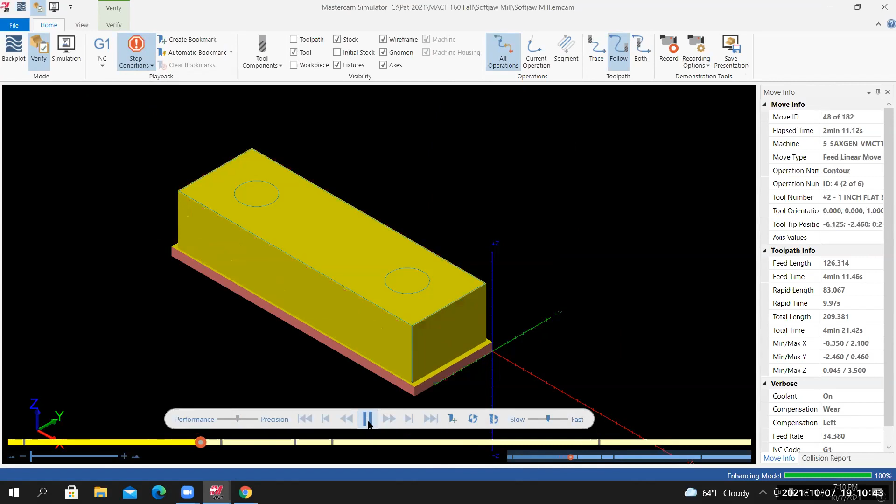I'm tumbling my view. And if I zoom in, I'm inspecting the drilled and counterbore holes. And you can see that the machined model pretty much matches up with the wireframe representation of the drilled and counterbore holes. Now, if you zoom in too close, you can see some imperfections or some jaggedness, but for the most part, it lines up. So I like what I see. From here, I'll exit verify. And I'll look at it from an isometric view and I'll save my work again.

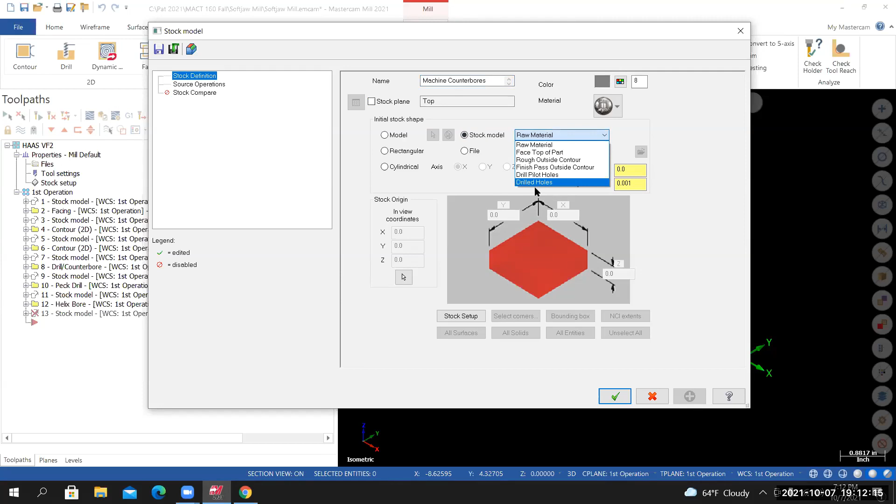We'll need to create the stock model that reflects all of the machining that we've done up to this point. I've got the insertion arrow at the very end of the toolpath group. Go to the toolpaths tab. In the stock section, select stock model. And for the name, we'll call this machine counterbores. Stock plane's at the top. Initial stock shape, once again, we're using a stock model from the previous operation. And then for the source operation, select the helix bore toolpath that we just created. Select OK.

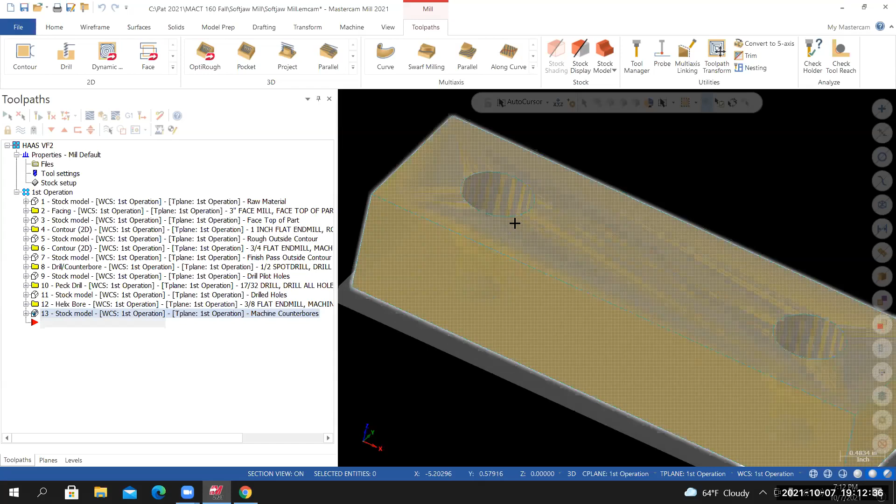Mastercam processes the stock model. And once again, you want to inspect the stock model very much like you do inside of verify. Just make sure everything is correct. And once you verify that it's correct, toggle off the visibility of the stock model. And I'll save my work again. So now that we've created the counterbores in the part, we're going to move on to breaking the sharp edges around the part.

Let's check the project page to make sure I'm doing things in the correct order. So let's see here. Step 8, use the helix bore toolpath to create the counterbore holes. We did that. Step 9, use the contour toolpath to create the engraved initials on the part. Okay, so I'll go down to the tool list. And the next tool, tool 7, is going to be the 1/32 ball mill.

And the tool will be actually a 2-flute ball mill. Tool holder will be a C4C4-0016, and the tool projection will be 1/2 inch.

To engrave the initials, I'll go back to the level manager. I'll make my name level visible. You can now see the geometry that represents my initials on the top of the part. So back to the toolpath manager. I'll go to toolpaths. We're going to use a contour toolpath to do the engraving. Go to 2D contour. That brings up the wireframe chaining dialog box.

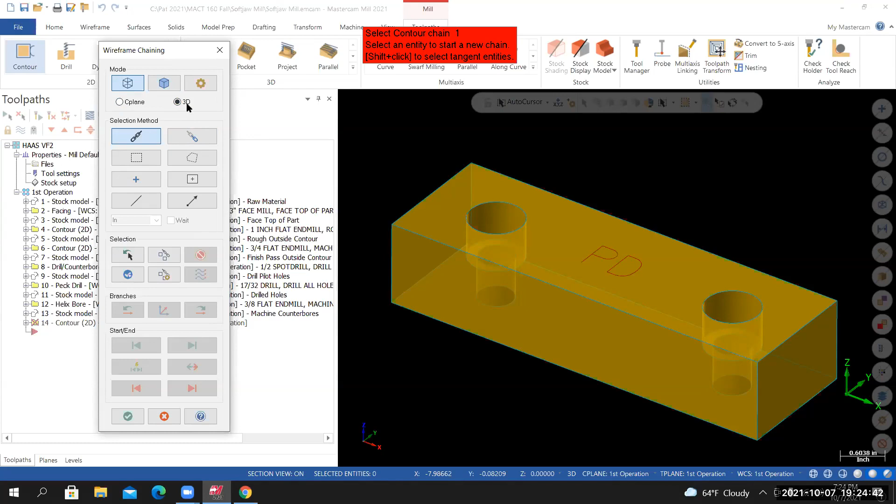Now, if it brought up the solid chaining box, solids or solid chaining and wireframe chaining. This is the mode that you want to be in, wireframe. C plane is selected. Change this to 3D. So mode, wireframe, change it to a 3D. And then for the selection method, I'm going to use window. I'll look at it from a top view.

So in my graphics area, I right click on the screen. I'll select top. And I'm going to create a window around the geometry that represents my initials. So drag a window over the initials, left click. The prompt changes. It's now saying sketch approximate start point. I'm going to let my cursor lock on to the bottom left point of my first initial. And then everything becomes selected.

I'll demonstrate that again. So for me, just deselect everything. Using the window method, I'll create the window around my initials. So it's prompting me, it says select contour chain one, sketch a window to select any. So left click, drag the window, left click to select it. Now it doesn't look like anything has happened, but the prompt has changed. I'm now going to let my cursor lock onto the bottom endpoint of my first initial, left click.

From here, I'll select OK. And that brings up the parameters for the contour toolpath. Let's start by bringing in the tool. I'll go to select library tool. We're going to bring in a 1/32 ball end mill. So I'll go to filter. I'll start by deselecting all tool types. I'll select none. Then I'll select end mill to sphere.

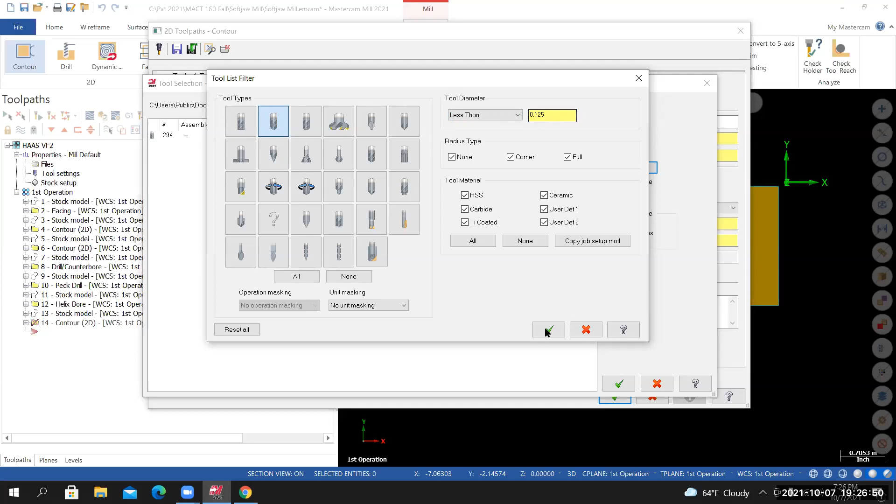For the tool diameter, we're looking for a very small tool. So I'll set this to less than, and then I'll type in 0.125. So it's going to show me all ball mills that are less than 0.125 in diameter. I'll select OK. I have three tools to select from. I'm looking for the 1/32 ball end mill. I'll double click on it. It's added to my tool list as tool number 7.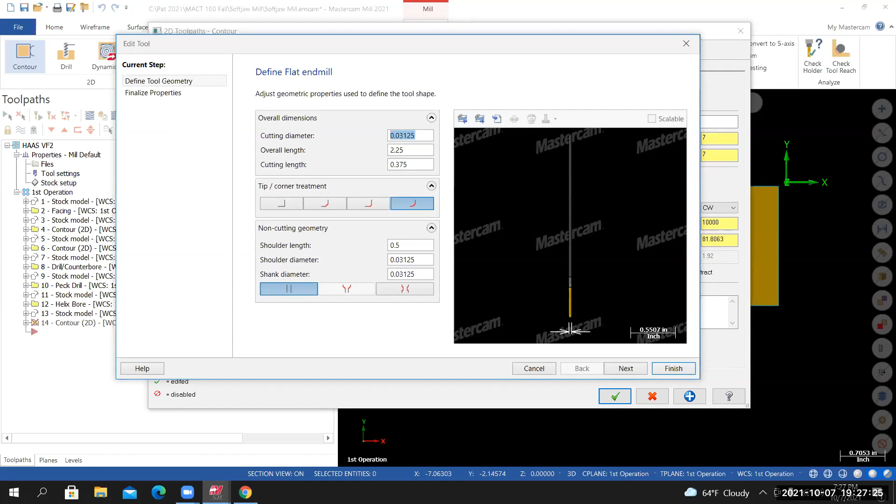We'll need to make some changes to the default settings of the tool. So right click on the tool, select edit tool. Now, the first thing I want to change is the overall length. This is a somewhat unrealistic representation of this tool. So set the overall length to 1. That'll be all the changes that we make to this page. Select next. Set the number of flutes to 2.

To calculate the RPM, select the calculator. It's maxing out at 10,000 RPM. To turn on the coolant, I'll select show more options. I'll select coolant. And then I'll set the flood coolant to on. From here, I'll select OK. That'll be all the changes that we need to make to this page.

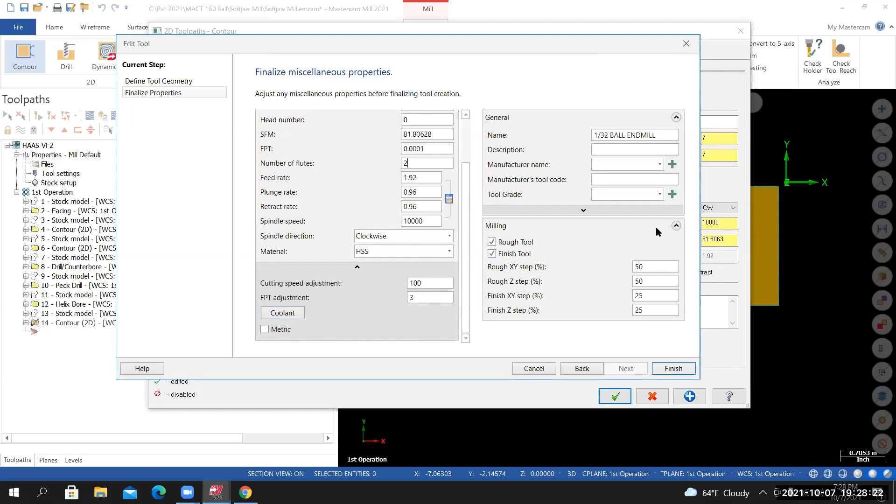So just to recap what I did, number of flutes, set that to 2. I calculated the RPM, and it maxed out at 10,000 RPM. Then I turned the coolant on. From here, I'll select finish. The RPM has already been calculated. You can see it here.

For the FPT, set this to 1% of the tool diameter. Here is the decimal equivalent of the tool diameter. So in this field, I'll type in 0.03125, multiply it by 0.01. I hit enter. My feed rate is being calculated at 6.25 inches per minute. This is my full feed rate. I would like to set my plunge rate to half the calculated feed rate. So in the plunge rate field, I'll type in 6.25, divide that by 2.

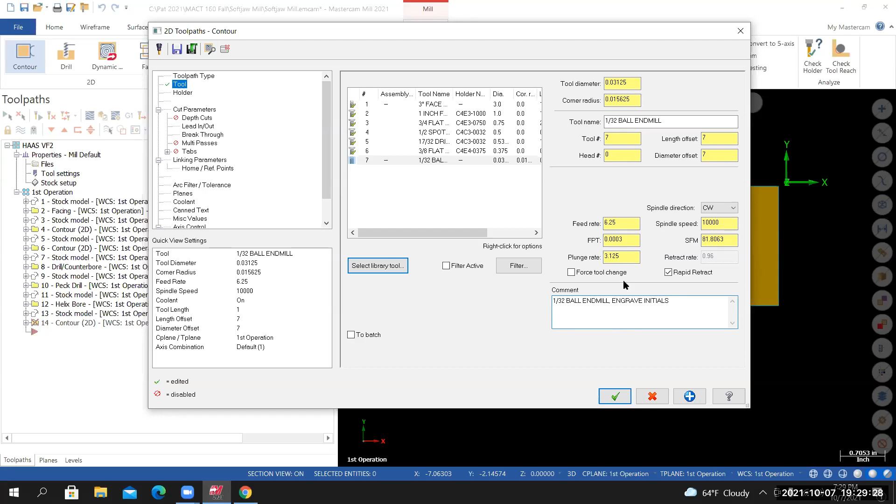I've got rapid retract selected. And then in the comment field, I'll paste the tool name, and some type of useful information, all caps, engrave initials. That'll complete all of the changes that I need to make on this page. From here, I'll go to holder. Now, once again, this is a Cat 40-inch tool, so I'll open up the Cat 40-inch tool holder library.

So CAT 40-inch. If I go back to the project page, we are looking for a C4C4-0016. So C4C4-0016. And then we're instructed to use a tool projection of 0.5 inches. That'll complete all the changes that I need to do on this page.

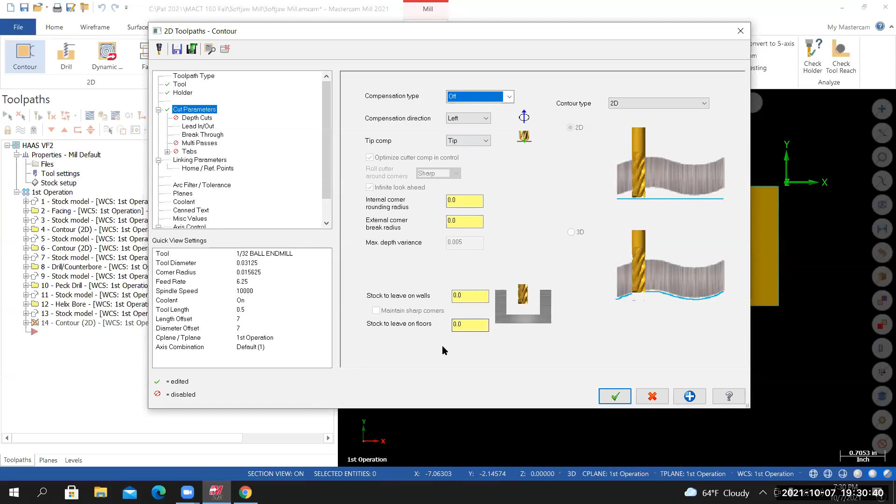From here, go to cut parameters. When we engrave with a contour toolpath, we need to turn the compensation type to off. Contour type should still be 2D. And then I'm accepting the default values for everything else. I've got 0 for stock to leave on walls and 0 for stock to leave on floors. I've got depth cuts turned off, no check here.

Lead in, lead out. Let's turn it off. So uncheck it. Breakthrough. Uncheck, breakthrough, turn it off. Multi-passes, not using multi-passes. So once again, if you have it activated, uncheck it. From here, go to linking parameters.

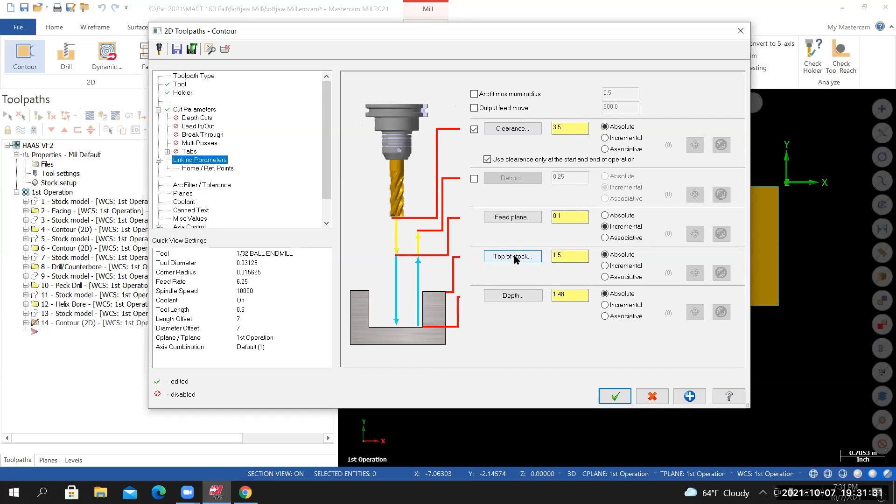Now, because we've used other contour toolpaths in this session of Mastercam, a lot of these values are carrying over. So the clearance at 3.5 is good. Feed plane 0.1 incremental is good. Top of stock. I want to select the top of the part. This top of stock is the top of the material. So I've got it set to absolute. I'll select the top of stock. I want to let my cursor lock onto something that represents the top of the part.

For the depth, once again, set it to absolute. I'll select the depth icon. And in this case, I'm going to lock on to the top of the part. It puts that value in this field. And then I'll click next to the value and type in -0.005 and then hit enter.

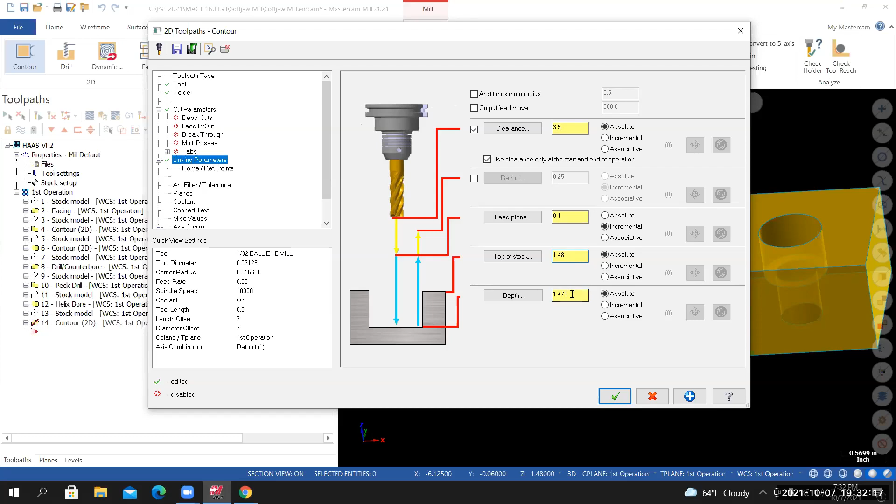So the difference between these two is 5 thousandths. This is the top of the part. We're going to a depth of, no, this is relative to the origin. So the difference between these two is the actual depth that we're machining into the part, 0.005. From here, I'll select OK.

I don't like how it's retracting all the way back up to 3.5 inches. So to avoid that, I'd go back into the parameters. Under linking parameters, let's activate retract. And in this case, let's leave it at 0.25 incremental. It'll be 150 thousandths above the feed plane. I do have use clearance at the start and the end of the operation selected, so I'll select OK.

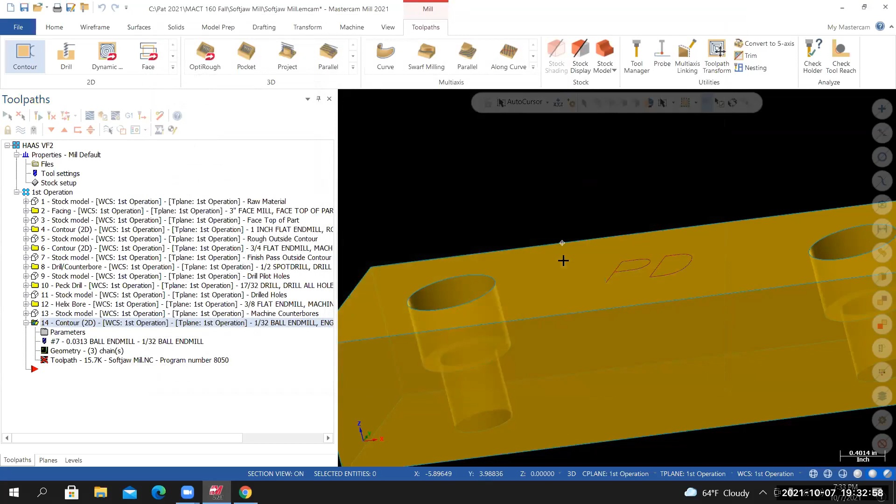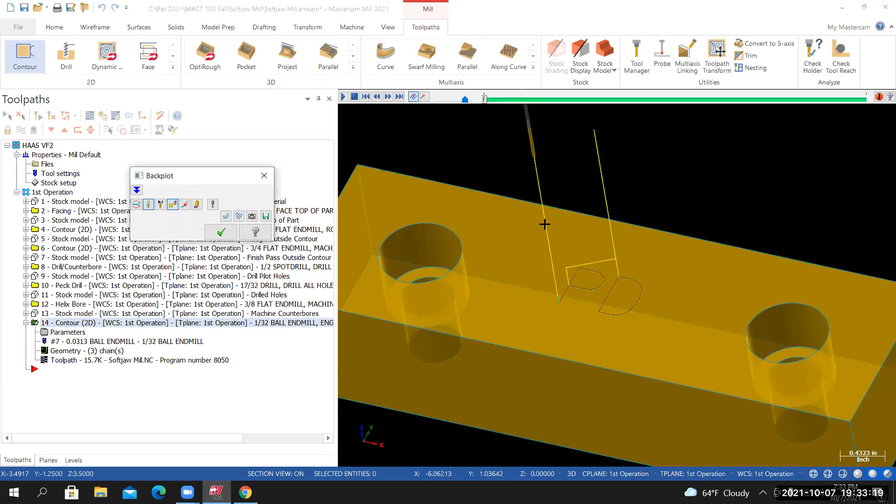I'll regenerate the dirty operation. And that looks to be a little bit more efficient. We're not wasting time going all the way back up to 3.5 inches. It appears to be good. So with just that toolpath selected, I'll run it in backplot. Now it's difficult to see because the line that represents the rapid move is almost as wide as the tool's diameter. So from here, I don't see any issues.

I'll exit backplot. I'll toggle off the visibility of that toolpath. I'll look at it from an isometric view, fit my screen, and then I'll unzoom by 80%. Before I run it in verify, I want to save my work. So file, save. I'll select the entire first operation toolpath group. Everything below it becomes selected. And then I'll run it in verify.

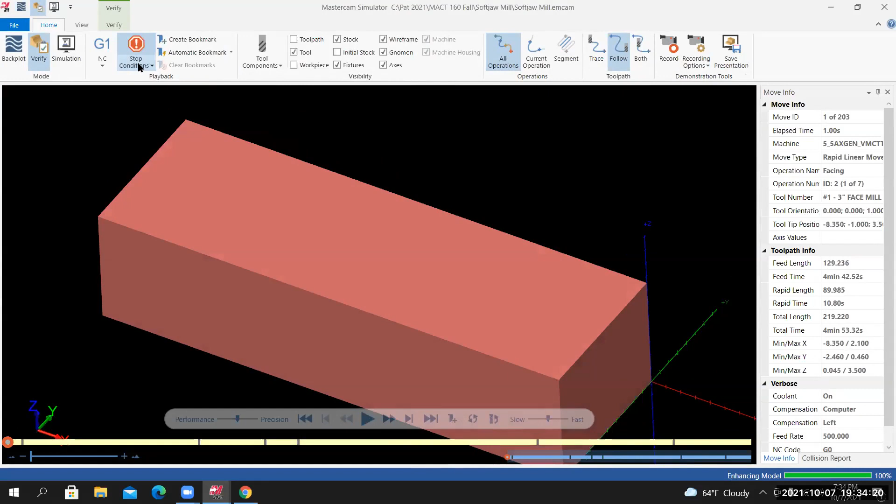Inside of verify, make sure stop condition collision is turned on, and then run it. Once it's done running, I'm zooming into my initials and inspecting the machined model. You should see the engraving with the wireframe geometry centered on it. We're telling Mastercam to take the center line of the tool and follow the driving geometry. And that's what I'm getting here. So this looks good. From here, I'll exit verify.

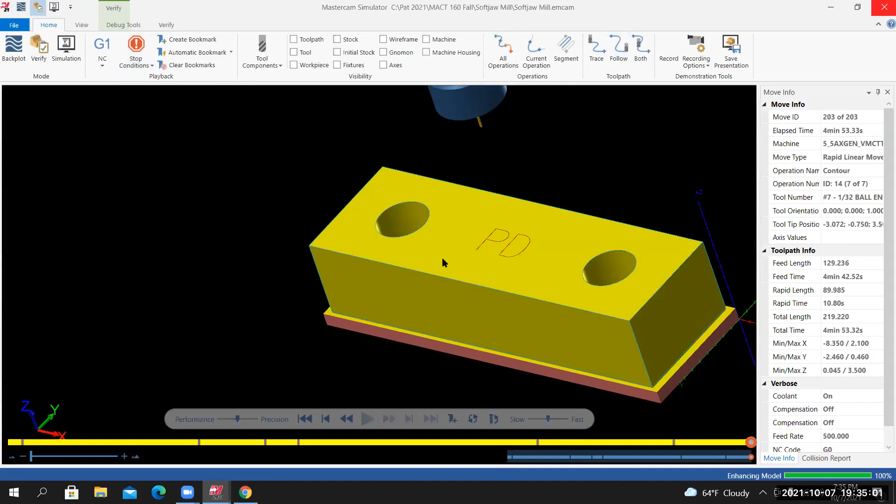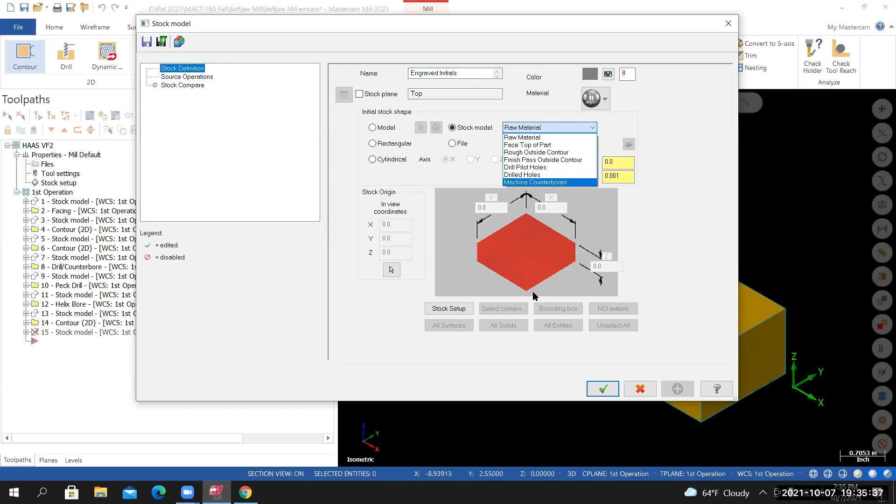I'll look at it from an isometric view. I'll save my work. The next thing we'll need to do is create the stock model. Go to toolpaths. In the stock section, select stock model. For the name, let's call this engraved initials. For the initial stock shape, I'm going to use the stock model from the previous operation. And then for the source operation, select the contour toolpath that we just created, the one we're using for the engraving. Select OK.

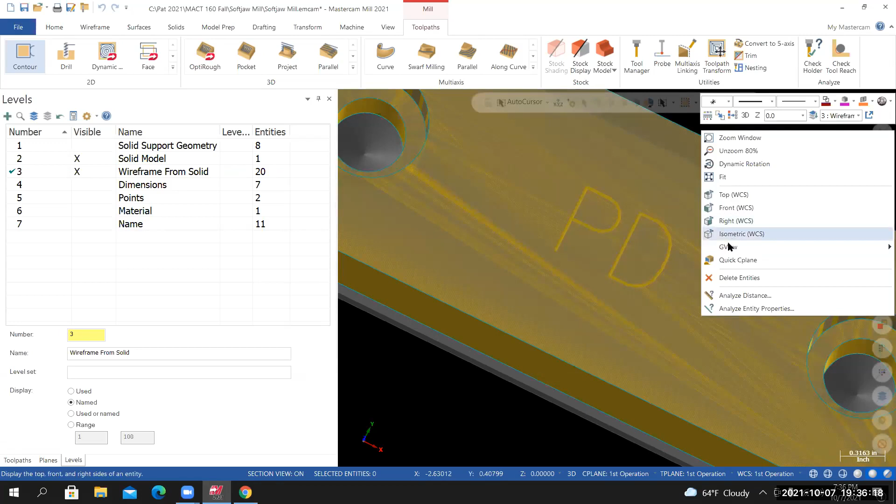It's not easy to see the engraving on the stock model. So I'll go to the level manager and make the solid model level and the name level invisible. And now it's easier for me to see the engraved initials. Once you verify that it's correct, you can make the solid model level visible. I'm going to look at it from an isometric view. Back inside the toolpath manager, I'll toggle off the visibility of the stock model, and then I'll save my work again.